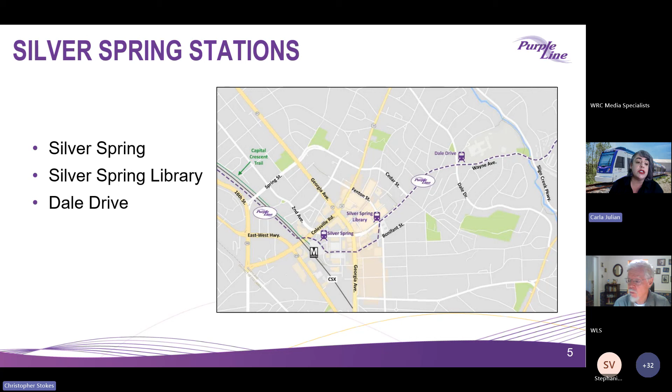The stations that we'll be focusing on tonight are Silver Spring, the Silver Spring Library, and Dale Drive.

Now I'm going to turn it over to Ray Biggs, who's going to introduce our fall progress video. Welcome everyone again, and thank you for joining us this evening. It was a very busy summer for us here at the Purple Line. We got much accomplished, and we have a lot to show you with the latest progress video that will be played now. Chris, let's play the video.

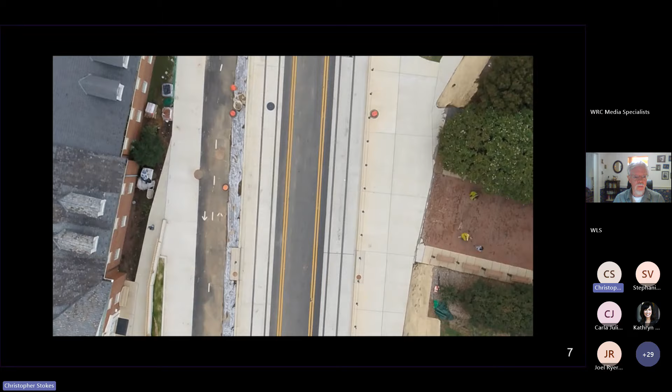Welcome to our Fall Progress Update video for 2024. We are here on Campus Drive at the University of Maryland, where we recently completed a lot of our summer construction work that finished the track installation along Campus Drive. We are excited that we have 5 light rail vehicles at our operations and maintenance facility, and we also completed 10 miles of track across the alignment. We also have over 17 miles of sidewalk installed.

You can see the colorful canopies right behind me, and we have 19 stations that will be in construction by the end of this year. We are excited that we are moving forward, building momentum on the project and continuing that going forward.

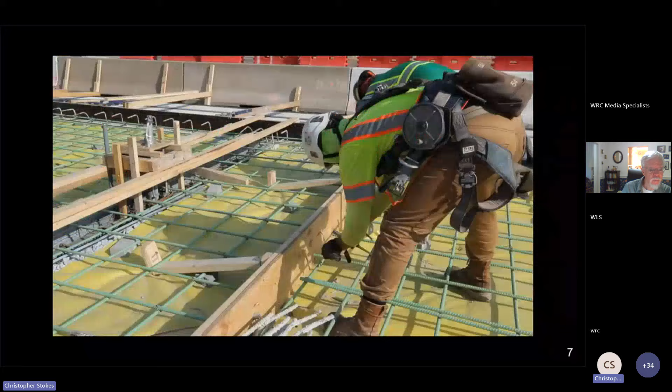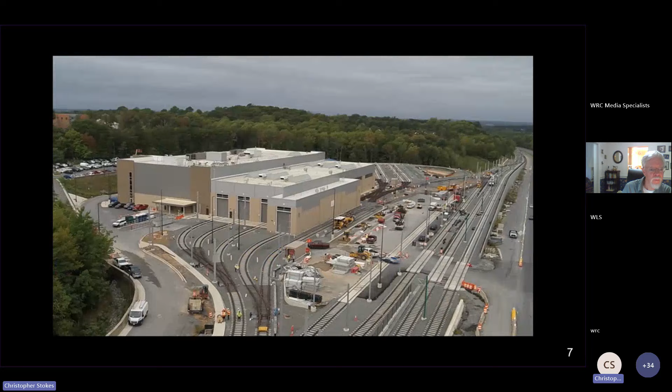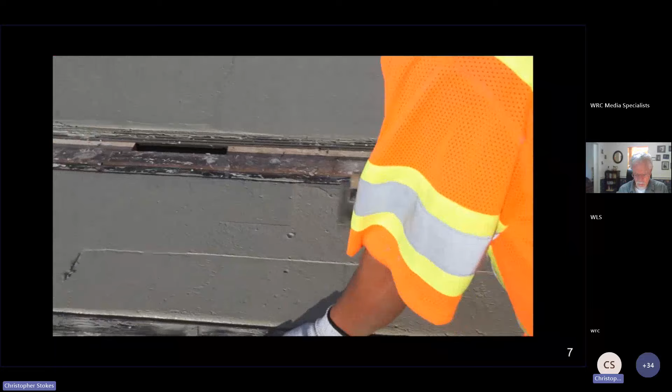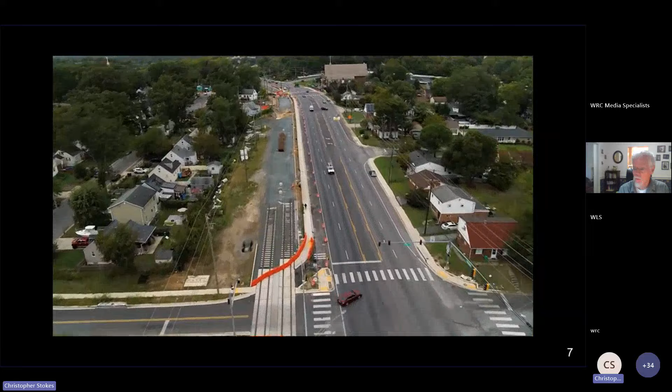Crews have focused on many specific areas to minimize impacts and advance the project. In Prince George's County, crews prepare for track placement by establishing work zones in the center of University Boulevard. Traffic is shifted to the newly completed sections on either side of the road. At the University of Maryland, crews have successfully completed much of the heavy construction through the center of campus. This year, students arrived to find newly completed sidewalks, embedded tracks, paved roadways, and all lanes open on Campus Drive. Also in Prince George's County, crews opened 2 new roads, 64th Avenue and Mustang Drive, both connecting communities to Riverdale Road at signalized intersections.

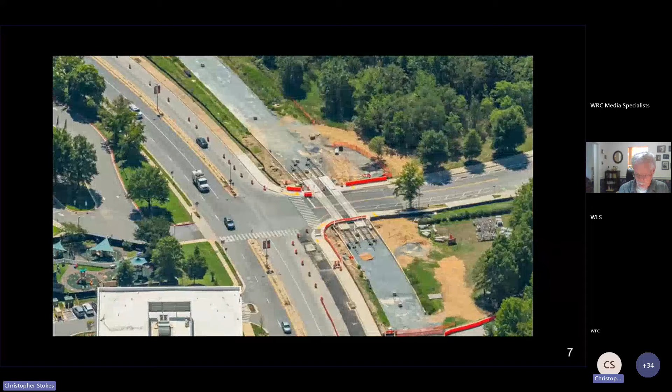The flyover bridge from Kenilworth Avenue over East-West Highway has also been completed. Track crews completed the crossing of Rivertech Court and opened the road 3 weeks ahead of schedule. At the operations and maintenance facility, the new light rail vehicles are being prepared for testing. I am honored and thrilled to stand here today at our operations and maintenance facility in front of this. Maryland, we have a train.

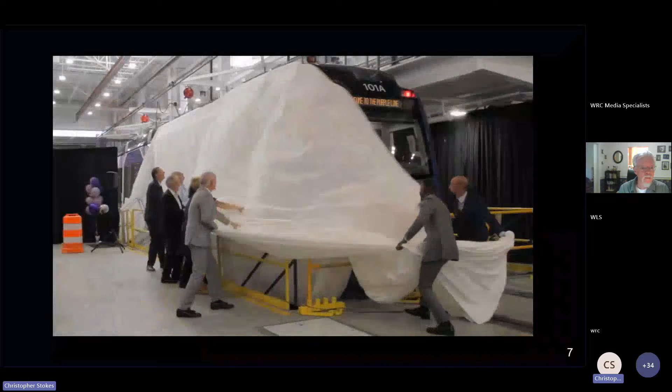Good morning. I'm Holly Arnold, administrator of the MTA, and I am so thrilled to be here today to celebrate the arrival of the first of the Purple Line light rail vehicles.

Huge congratulations to the Purple Line team. This team does not sleep. They are working all the time to deliver the Purple Line for Maryland, and I'm so thankful and grateful for them.

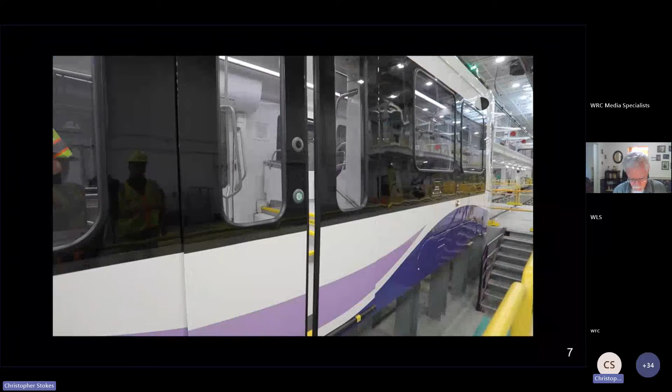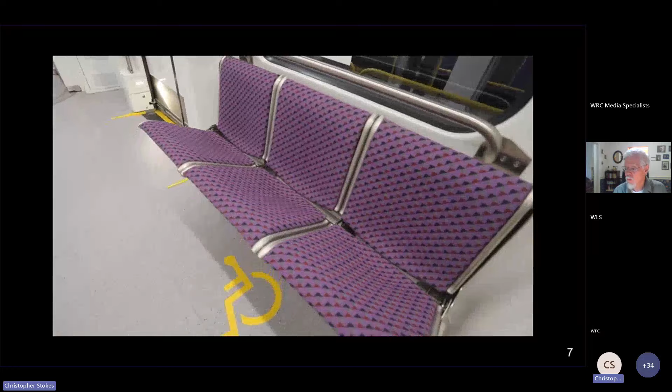These vehicles are 142 feet long, nearly half of a football field, almost twice the size of a metro vehicle, and will be the longest light rail in North America. It'll hold up to 430 passengers. There will be 8 bike racks on board, as well as 8 dedicated wheelchair spaces accessible near the doors.

These electric-powered LRVs will reduce energy and carbon emissions, as well as being quieter than other modes of transportation.

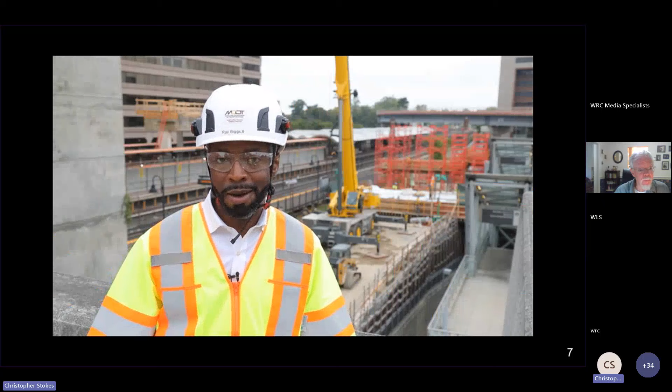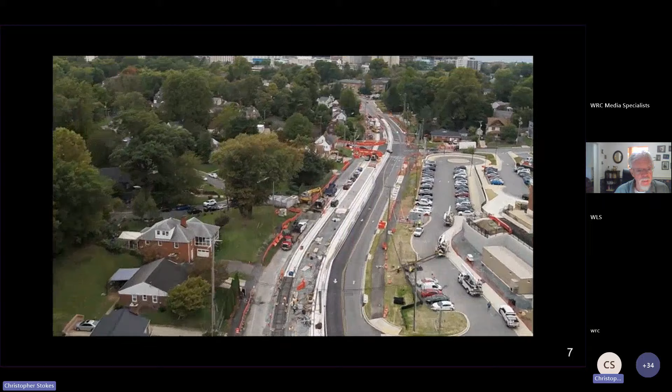Over the summer, we worked very closely with our partners at CSX, WMATA, Montgomery County Parks, and Montgomery County Schools to complete a lot of construction work and installing track all across the alignment. In Montgomery County, the Purple Line has successfully placed both sets of tracks across the Wayne Avenue and Dale Drive intersection prior to the start of the school year.

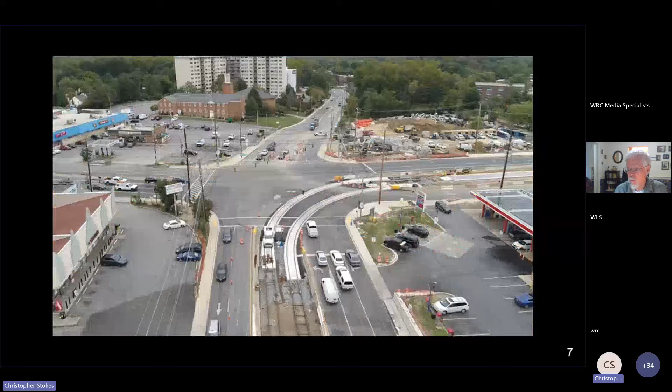They have also installed the complex curved track at Piney Branch Road and University Boulevard, and fully opened the Talbot Avenue Bridge.

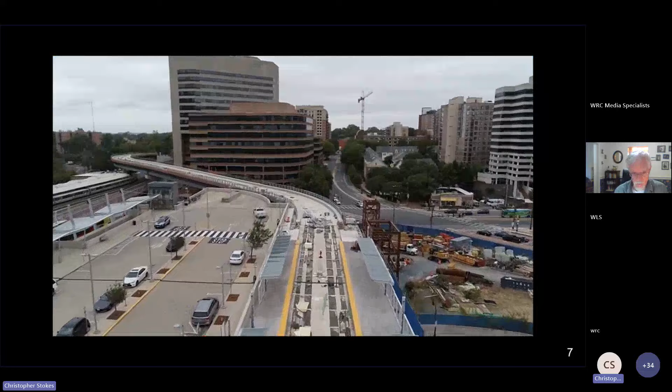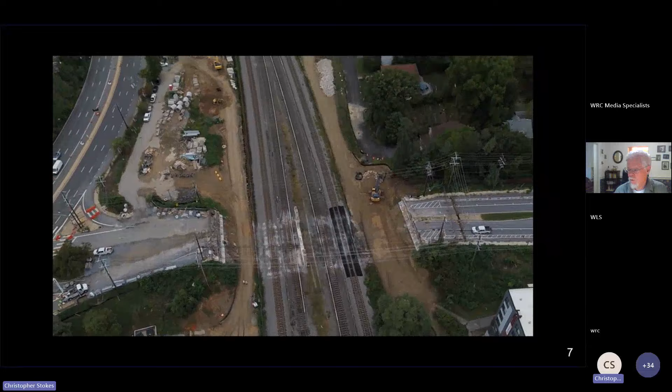At the Silver Spring Transit Center, the LRV bridge over Colesville Road and the foundations and superstructure for the new mezzanine are taking shape. Crews also started the work to build a new and improved Spring Street Bridge by completing the bridge demolition during the WMATA summer shutdown.

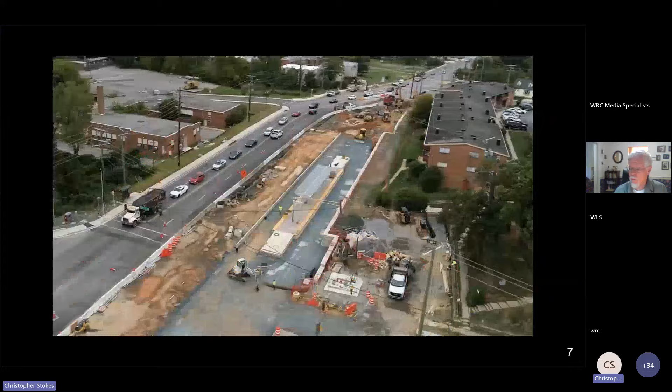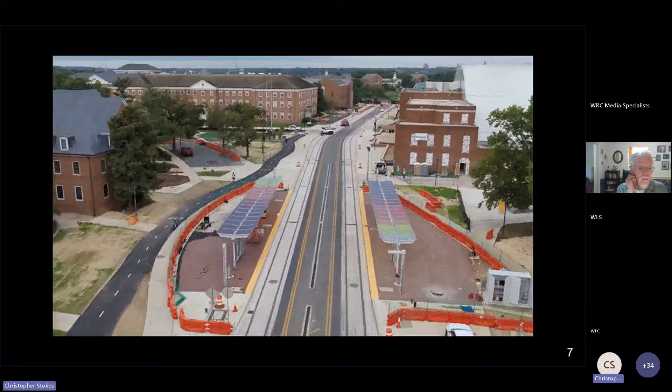Station construction can be seen across the whole alignment, with station after station taking shape. The highlight of the station construction is the installation of the first Art in Transit artwork element at the Campus Drive UMD station. The artists at Legge Lewis Legge added a beautiful display of color that changes throughout the day and is a shining example of things to come at the Purple Line.

Thank you again for your patience, and while we continue construction, we are going to keep the momentum up across the alignment, moving from laying track into the testing phase of the light rail vehicles across the alignment. We are so excited about the Purple Line, and we know you are too. Thank you.

All right, so that was a glimpse of all the progress that we had over this summer, and a lot more to come as we finish out this calendar year. As you can see on your screen in front of you, this is our project timeline for the project going forward. And I mentioned that we're now going to be entering that testing phase of our light rail vehicles, where we'll start static testing and dynamic testing later this year. So looking forward to that, and then we'll be moving on to the next years and then towards revenue service.

The pictures here you see on this project timeline show the vehicles, and then the catenary system there in the second picture that is along Veterans Parkway. You see UMD and also the art installation that was mentioned in the video that is on UMD campus.

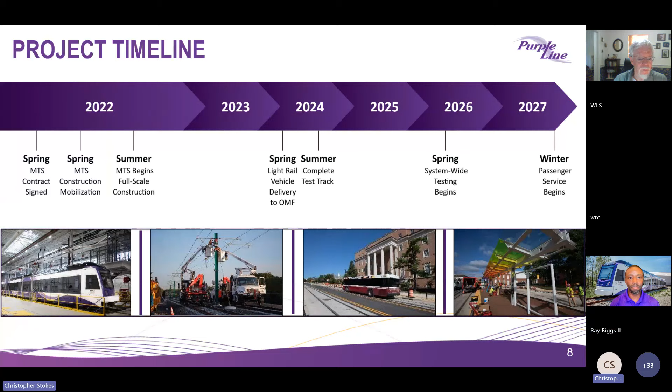So now I'll turn it over to Scott, who will provide our construction update for the Silver Spring area. Scott?

Thank you, Ray. My name is Scott Glass. I'm the area manager of the work in the Silver Spring area. I wanted to review here the work that's been happening in Silver Spring at Spring Street Bridge.

As Ray mentioned and the video showed, we started the closure of that bridge in early June, and we were able to get the demolition completed while the WMATA shutdown was in progress. We also have been able to progress the critical utilities that you can see in the aerial utilities in this picture. And we've now begun to remove the bridge abutments, and we're continuing to relocate those aerial utilities.

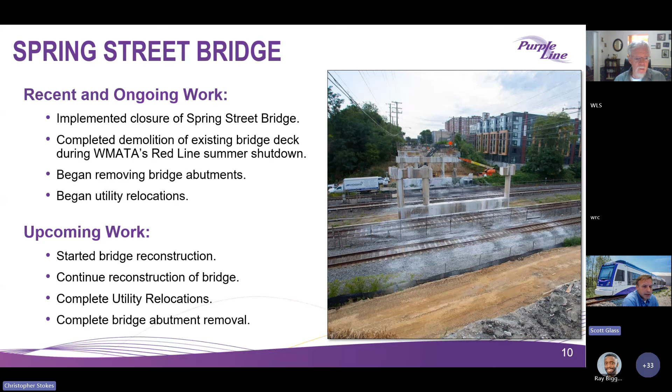Over the next 6 months, we'll be starting and completing the foundations and continuing the construction of the bridge through the spring. We'll also be completing these aerial utility relocations and some of the remaining minor demolition on the crash walls there.

Next slide. Right here you can see right now we have an active closure for the Spring Street Bridge that directs traffic around 16th Street from the south side to Georgia Avenue. And when approaching from the north side, it directs traffic east along 2nd Avenue over to Colesville Road. That closure will be in effect until spring of 2025 when we open the new bridge.

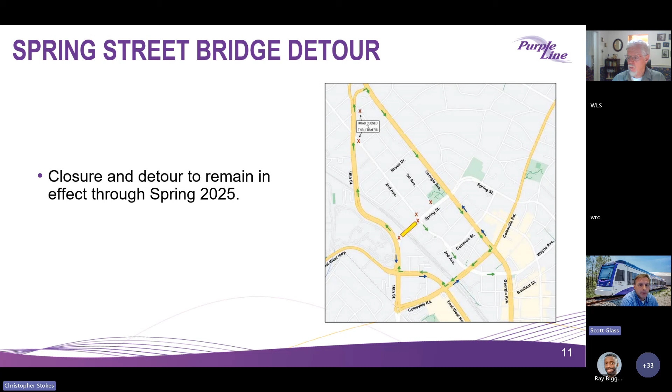The LRT bridge, light rail train bridge, for the Purple Line over Colesville Road, we have completed in the last 6 months. We've completed the bridge deck and the safety walks that you can see in the photo here on the right. We've continued the light rail bridge ramp adjacent to the train tracks behind the Falkland Apartments. And we've completed the duct bank installations that run on either side of this bridge all the way across, encased in concrete to create the safety walks.

We've also recently started the installation of all of the safety railing, the permanent railing that goes along the top of this bridge.

So over the next upcoming work, over the next few months, we'll finish up the work on top here and complete the permanent railing installations. We'll remove all of the temporary formwork and railings that you see out there, and we'll prepare for the installation of track across the bridge.

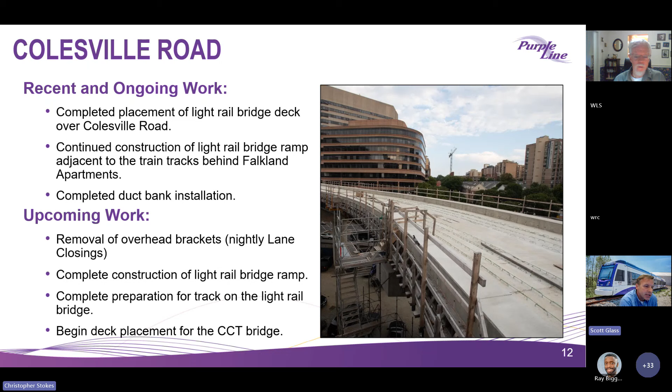We'll also be erecting the catenary posts across the bridge there, and we'll also be starting the abutment for the east abutment of the CCT bridge, which is adjacent to this LRT bridge.

At the Silver Spring Purple Line station, recent work has had continuing activities at the platform level where the Purple Line train will pull in, completing all of the canopies and windscreens. You can see them working on those in this picture. The glass canopies and architectural elements have now been installed.

The glass windscreens are now completed, and we are approaching the point in time now where we'll be continuing the track through this station and across the LRT bridge. We've also completed the elevator structural steel erection, which is adjacent to this.

It will house the elevators and the stairs. In the future, over the next several months, up to 6 months, we'll be completing that elevator and stair structure. We'll also be bringing in the utilities that involve water and sewer to that structure, as well as the permanent power for this station.

We have long awaited a recent completion of a PEPCO relocation that's enabled us to progress and proceed with the new power service to this station. On the east end of that station, we'll also be installing the approach slab to that bridge and preparing for the track to cross.

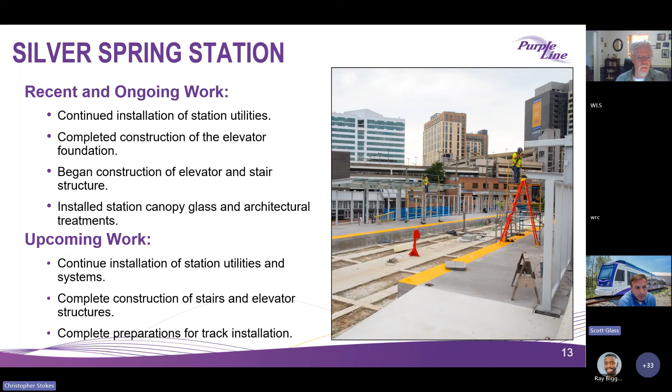At the Silver Spring Transit Mezzanine, the bridge that will connect the Purple Line station to the WMATA Metro station at Silver Spring, we had a summer shutdown that closed this station so we were able to work 24/7 to construct the new structure elements in the platform itself. We completed all of the foundations inside the Metro platform, the vertical columns to the mezzanine level, the second story level that will bridge across the Metro and CSX tracks.

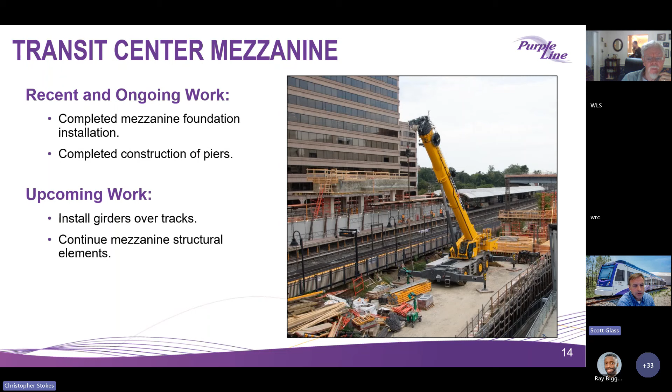Over the coming months, we'll be completing the North Tower behind the crane in this picture and erecting the girders over the tracks, then continuing into the winter, December months, doing a lot of steel erection and canopies on this mezzanine.

That takes us over into the Bonifant and Georgia Avenue area. I'm going to turn it over to Julio.

Julio, you online? Yes, I am. Good evening.

I will pick it up here and give you a quick update on what's going on at Bonifant Street and through Wayne and the rest of segment 3 and into segment 4. Some of the ongoing work that's been going on right now is we are in the final steps of actually doing a traffic switch on Georgia Avenue.

It was actually scheduled for this week. It's been postponed due to weather. We're hoping that we will get that traffic switch done before the end of the week, which will move all the traffic on Georgia Avenue to the west side, which will then allow us to continue on with our utility work. After all that utility work and underground work is done, we'll make preparations for track installation on Bonifant, what we call Bonifant East.

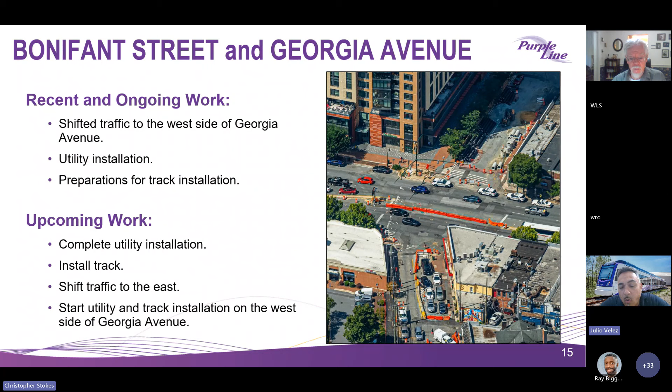Once that traffic switch is done, we will continue working on duct bank, drainage, sewer line relocations, and that work will go on from now through year end.

Also on Bonifant, you can see that over the summer we have done a significant amount of work, including storm drain and overhead catenary systems. We're also in the process now of starting our track installation, so you will see upcoming track starting over the next couple of weeks, continuing through the end of the year.

Hopefully we'll be able to start restoring Bonifant once we continue with the track installation and move on to building the permanent curbs and permanent sidewalks on Bonifant.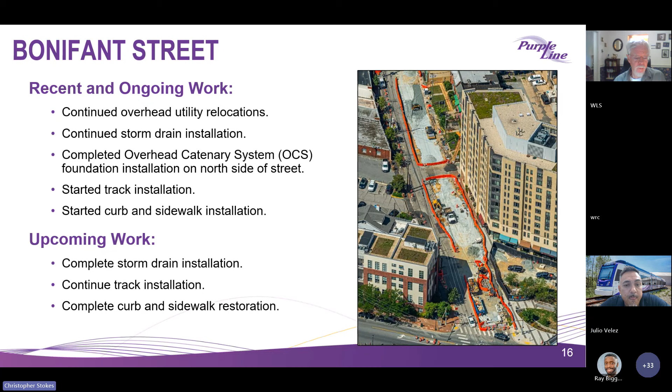As you make your turn from Bonifant towards what we call the Silver Spring Library, we have completed the station platform. We're also now working on all the underground work, what we call duct bank, which is now all being installed, and now that we've prepared the surface, track will be able to be installed through the station.

So the upcoming work will be installing all the track and continuing all the outfitting of the actual station, including all the architectural finishes like brickwork and opening up access through the station. That'll be ongoing from now through the end of the year.

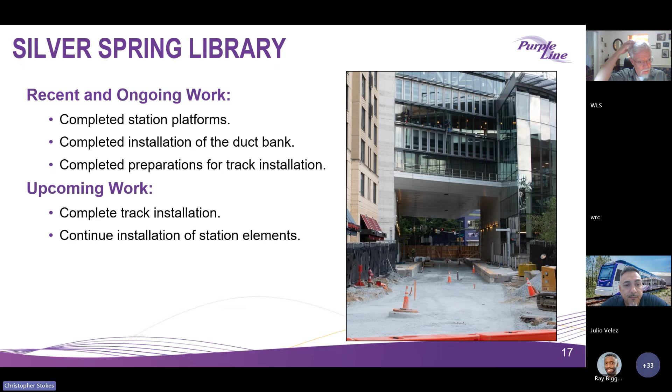Once we make our turn onto Wayne Avenue, the bulk of this Wayne Avenue between Fenton and Dale, we have been doing a significant amount of work on retaining walls. Overhead catenary system foundations are almost all complete, and we have been working on storm drain. Those efforts will continue over the next several months, trying to get a retaining wall which will allow the widening of the road to occur in the future.

That'll continue ongoing. We will also soon be resuming our sewer line relocations in this area that have been waiting on some overhead conflicts to be completed, and that work is slated to be completed over the next several months. That will then pave the way for the completion of sewer lines, storm drain, and then what we're all looking for is the final curb and sidewalks in this area.

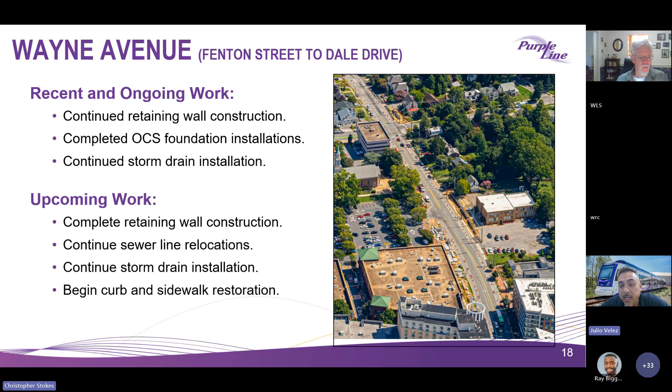On this corridor between Fenton and Dale, there is an upcoming traffic switch, presented here. In order to allow construction of track through the intersection, we're working closely with the county and all the major stakeholders right now to restrict a left-hand movement on Cedar. This is similar to what was done this past summer on Dale, and will allow us to build both tracks through Cedar with an approximate timeline of one month. The anticipated timeline for this work is around January of next year.

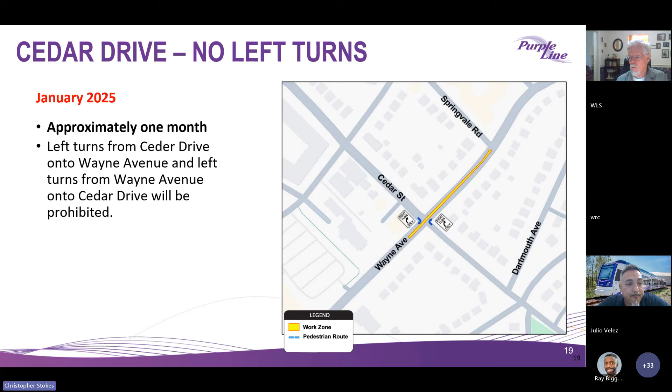The work going on between Dale and Sligo: we are now working on completing all the OCS foundations. We are also continuing track installation. A significant amount of track has already been installed, and those efforts will continue. We have just recently done a traffic switch where the bulk of the traffic is now traveling on the north side, allowing work to continue on the south side.

The Dale Drive station, if you've driven by there lately, you see that all the underground foundation and slab work is done, and soon we will be continuing on the station work. So canopies will be installed, windscreens will be installed, and over the next several months that station will start taking place.

Also along this corridor, we will continue what we call planter box installations, which is part of our drainage system. That work is also scheduled to start here over the next several weeks and continue through the end of the year. Track installation will also continue as it's going on right now.

And then we are looking forward to being able to start completing the permanent curb and sidewalk installation on the south side. This past summer we were able to do the permanent sidewalk on the north side, and now we're looking to repeat that process on the south side.

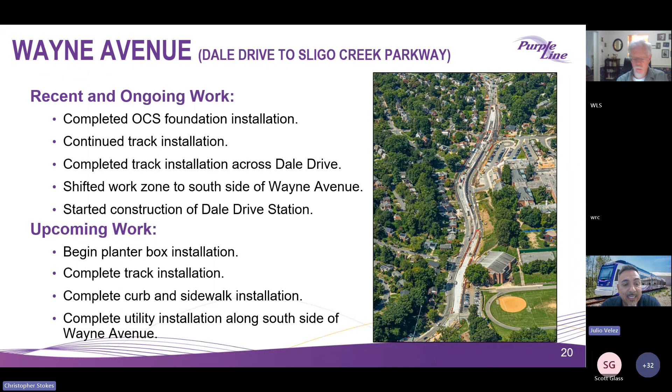Also on this corridor, we're looking to complete the installation of all the utilities along the south side of Wayne Avenue, which will be the last of the underground work between Mansfield and Dale, allowing us to put in all the permanent curb and sidewalk.

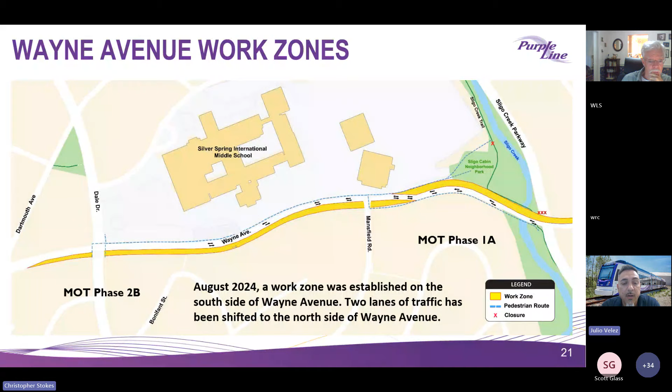Next slide, please. We have recently done a traffic switch, moving all the traffic to the north side and being able to then transition once you cross Mansfield back onto the south side. That was just done over the last several weeks. This will allow all the work on the south side between the Silver Spring International Middle School and the Sligo Parkway, which has just recently been closed since September 16th to be exact, and that is slated to continue going on from now through November.

Next slide, please. Once that work is completed on the parkway and it's opened up, there's also a plan to extend the work limits through Mansfield Road. In order to construct track across Mansfield, there will be a detour provided, and Mansfield will not have through traffic for a period of approximately one month, to allow the construction of the track to cross, and then we will open it back up.

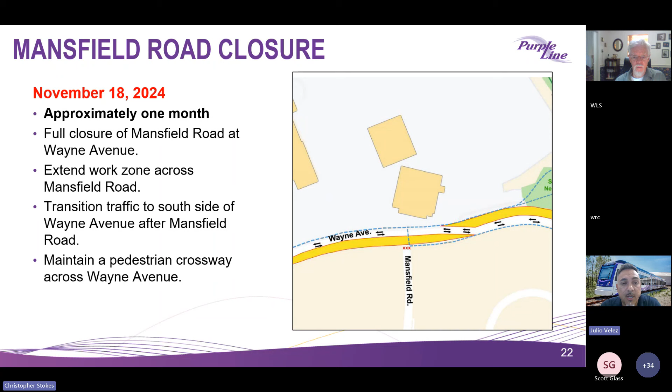This will not impact any of the pedestrian movement required here to maintain the schools and everybody functioning ped-movement wise. But in terms of being able to construct track across Mansfield, there is an anticipated closure for approximately one month, starting November 18th. This is what the proposed detour would look like once Mansfield becomes a dead end for that period of time. We'll be able to use Dale Drive as the main thoroughfare to access Mansfield.

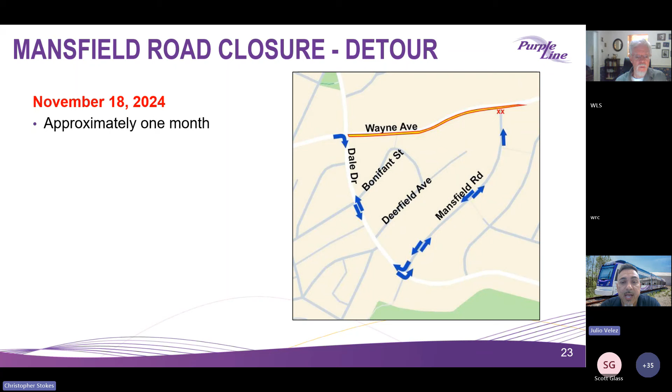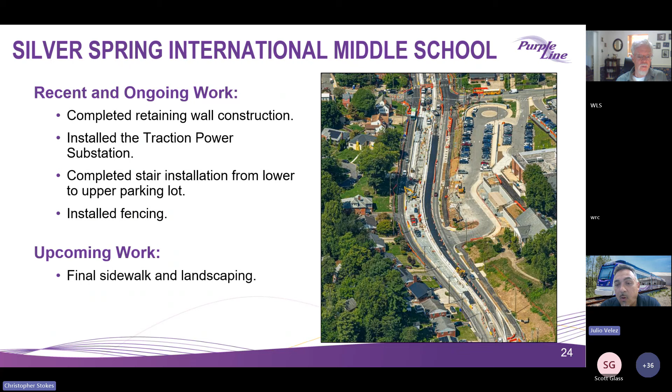Up and coming, we've been working on the traction power substation right in the heart of the SSIMS school. That work has been ongoing, and we've already installed it. We're now making final preparations to get PEPCO on the timeline to energize the substation, installing all the fencing around the school, and completing all the stairs and permanent handrail around the school to finish the architectural finishes. Then we'll move on to completing the final sidewalk and landscaping around the school property.

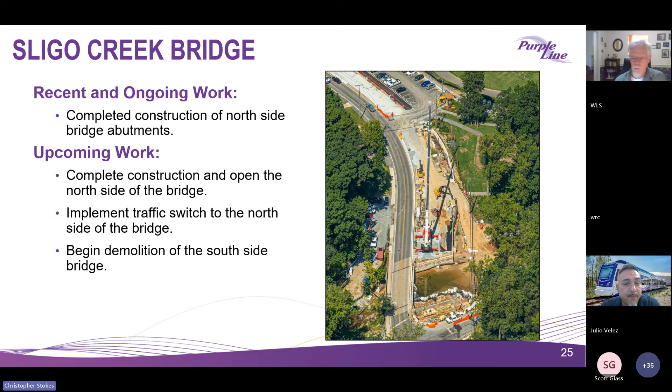Up and coming and ongoing, we've been working on the north side of the Wayne Avenue Bridge, and we've just recently completed the bridge abutments. If you've driven by there recently, we've now set the girders, and we're looking to complete this bridge between now and through the end of November. That'll allow for a future traffic switch to put traffic on the newly constructed bridge on the north side, which will then allow us to begin demolition of the south side of the bridge, slated to occur towards the end of this year.

The timelines we're talking about right now: as I mentioned before, September 16th is when we close the parkway. The parkway will remain closed through November 18th, allowing us to build track and finish construction of the bridge. Once November 18th comes, this closure will extend through Mansfield. So as the parkway opens up, Mansfield Road closes to allow the track to be constructed through Mansfield Road.

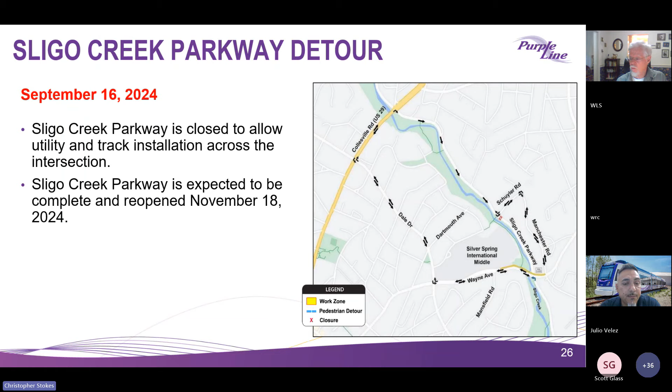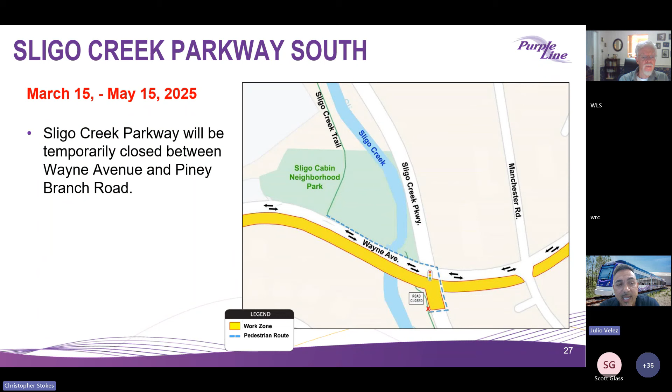Once we make the traffic switch onto the north side and the newly constructed bridge has traffic, we'll plan an outage shutting down the parkway. Right now it's scheduled on or around March 15th to May 15th. That'll also allow the track construction on the south side to be built across the parkway and onto the south leg of the Wayne Avenue Bridge.

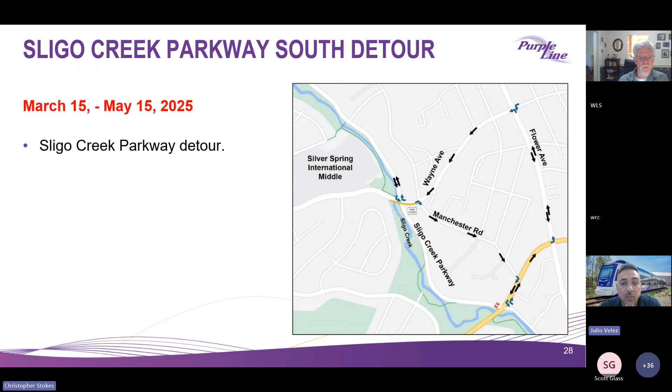The proposed detour, once this goes into place, is shown here on the attached sketch. Manchester Road, Flower Avenue, and Piney Branch will be the main thoroughfares used during this timeline during the construction of the track across Sligo Parkway.

Once we cross Sligo Parkway towards Manchester, some of the work ongoing over the past several months has been waterline. An entirely new waterline system is being installed, and we're now completing elimination of the existing waterline. That'll pave the way for the remaining storm drain to be completed. We're also working on the retaining walls right now, and that work will continue through the end of November.

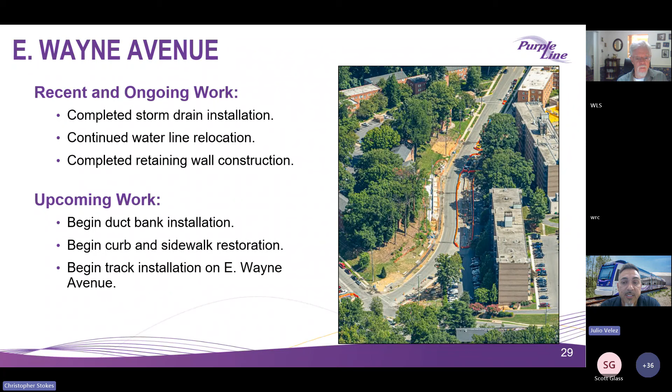Once that wall work is completed, that will allow us to resume work on duct bank and start making final preparations for the permanent curbs and sidewalks to be constructed on the north side of Wayne Avenue. Then the goal would be to continue working track uphill towards Manchester Place. That's a quick update on the construction at Wayne Avenue.

We thought it'd be good to start giving you guys an update on systems and testing. For that, I'm going to turn it over to Seren. Let me just get my camera on here.

Thanks, Julio. My name is Seren Serkisoon, and I'm the systems manager for the project. I wanted to spend a few minutes talking about a very exciting milestone tonight: our test track. Our test track is located adjacent to the OMF facility where we store the trains. It's about a mile long and runs parallel to Highway 410 between Annapolis Road and Riverdale Road. The test track will be utilized for dynamic running of the light rail vehicles, and it'll focus on qualification or proof of design of the LRV subsystems and their major interfaces.

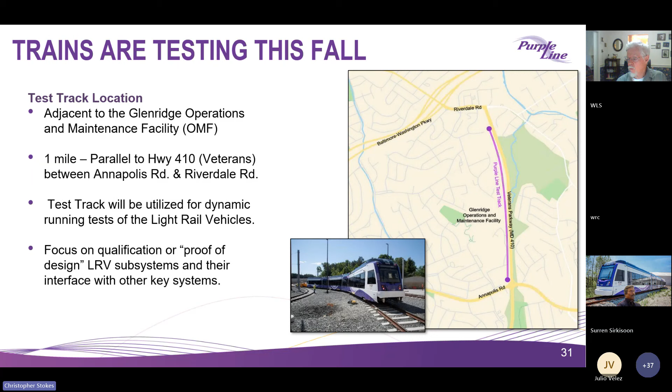Current status of our test track: we've got 5 light rail vehicles delivered. They've been static tested, meaning tested without actually running on the track, so they're ready to go on the track. We've got 8 more planned for this year. The track's been built and tamped, and we have inspection and testing currently in progress for the track work.

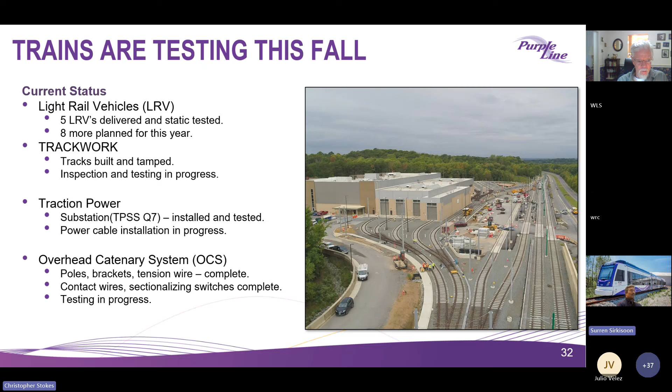The traction power system that'll power the tracks, substation Q7, located on the western end of the test track, has been installed and tested, and we're currently finishing up some cabling work so we can get the overhead catenary connected and powered. The overhead catenary system—poles, brackets, and tension wires—is complete. The contact wire has been installed along with switches, and we're testing that as well to get it ready for utilization of the test track.

What are we going to use the test track for? Essentially, it's to prove out our design. We'll start off with braking and propulsion on the test track. The train does reach a maximum speed of 50 miles per hour, so we will be testing for getting up to speed per design and being able to brake per design.

Later on, we'll be testing the automatic vehicle location system as well as various emergency systems on the trains to see how well they communicate with the control center, which is in the OMF building adjacent to the test track.

Training - we've trained operators on operating and maintaining the trains. We've also trained first responders, police and fire departments in the neighboring towns so that everyone is equipped and ready should there be an incident or an emergency while we use the test track.

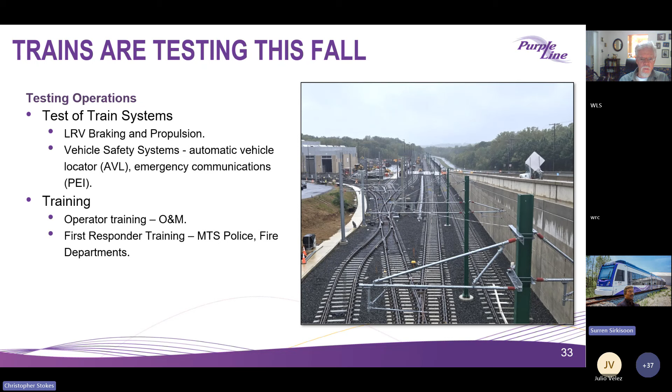Safety first. Safety, of course, is always our top priority. Essentially, the test track is off limits to anyone other than construction personnel.

So the LRVs that are seen running up and down the test track, of course, are not in service. The test track is a dedicated alignment. There's no access for the public. There are no road crossings. We stop short of Annapolis and also short of Riverdale on the other end.

We have a state-of-the-art system, essentially part of the train control system from Siemens, which we'll be utilizing on the test track to prevent overrun of the trains as they approach both ends of the track. So that system is designed to be fail-safe and vital, and we feel confident that it'll achieve maximum safety for utilizing the test track.

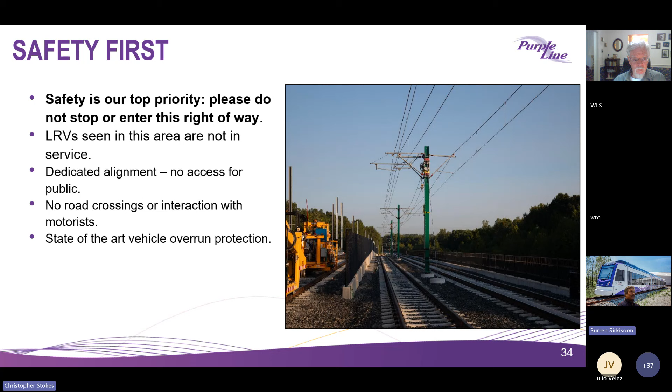So as we are across the alignment and in Montgomery County, we do participate in a lot of community events. The Purple Line team participated in many in Montgomery County, including Silver Spring National Night Out and the Bethesda Arts Festival, among others. So as we are impacting, we are out engaging in the community.

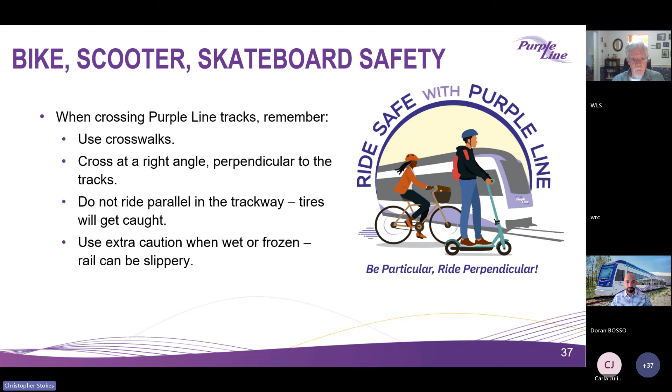As Julio mentioned, and everyone on this call knows, we're doing so much work right there in front of those schools that we're happy to support them in their learning. So that was great, and we're looking forward to the next round of community grants with applications due November 30th - so still 2 months to get those in. You can find all the information on the website under the resources tab. So if you have a good nonprofit group that could use a little extra boost, we would be pleased to receive an application and potentially support it. All the information needed is on the website. It's a very quick application.